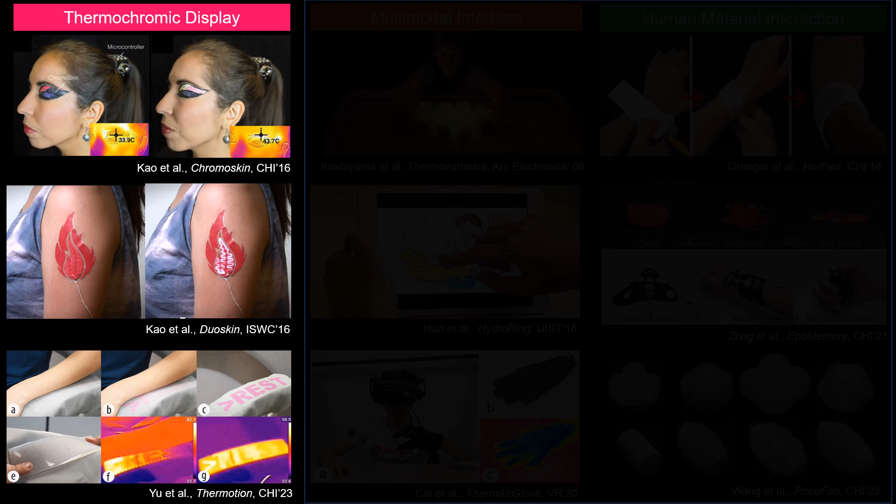Heat has been used in many areas of HCI research. For instance, a variety of wearable and ambient thermochromic displays have been investigated by controlling the thermochromic ink color based on temperature. Media artists and XR researchers have explored the thermal sensation in multimodal interfaces to enhance the reality of digital images and virtual objects.

With the emergence of the FDM 3D printer, heat has become a popular medium to customize the shape of 3D printed structures and is often used as a stimulus to transform multiple shapes in human-material interaction. Thermoelectric Peltier modules, thermofluid systems, and Joule heating circuits have been used as common heating methods.

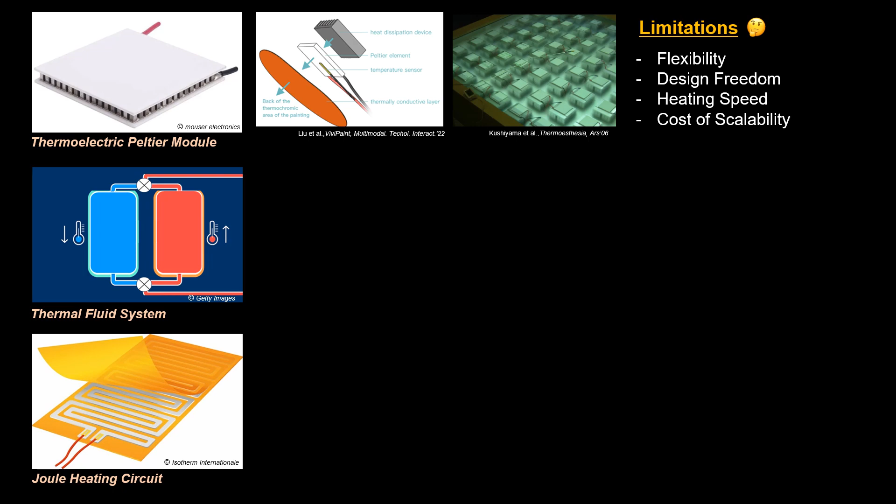However, there remain critical issues. For instance, the Peltier module is bulky and not flexible. It is also expensive to scale the number of units. The thermofluid system has been used in flexible thermal interfaces and flexible thermochromic displays. However, we need an external water bath and a complex fluid control system, which makes it difficult to build a compact built-in heater.

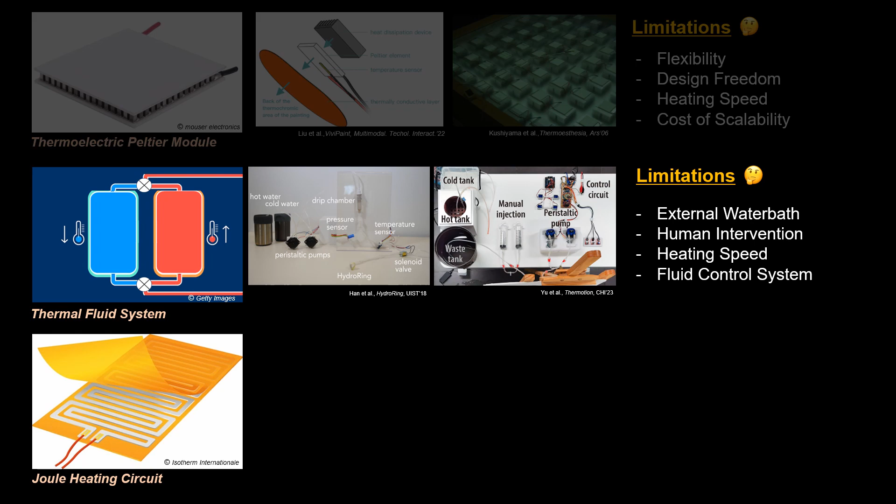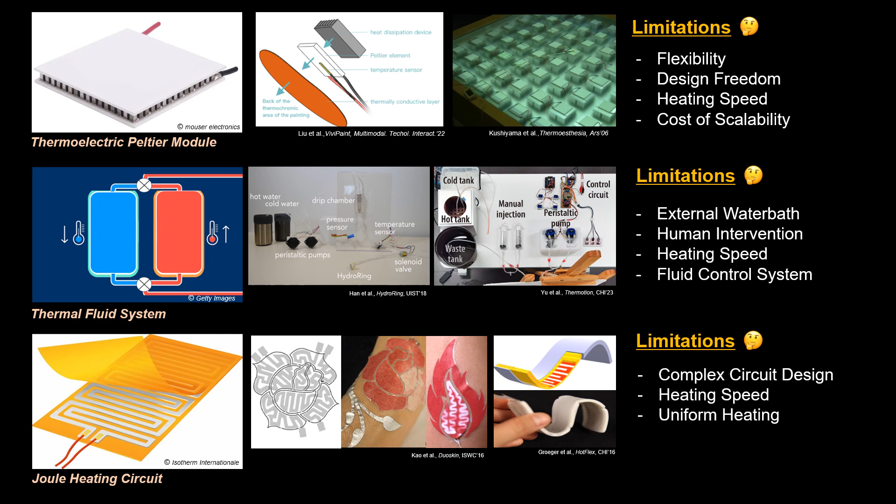Joule heating has become the most popular approach for flexible and embeddable heaters. However, it is difficult to design heating circuits with complex shapes. Uneven heating and limited heating speed remain a problem in thermochromic displays and human-material interaction. To address these issues, we explore the possibility of the carbon nanomaterial Joule heater as an alternative method.

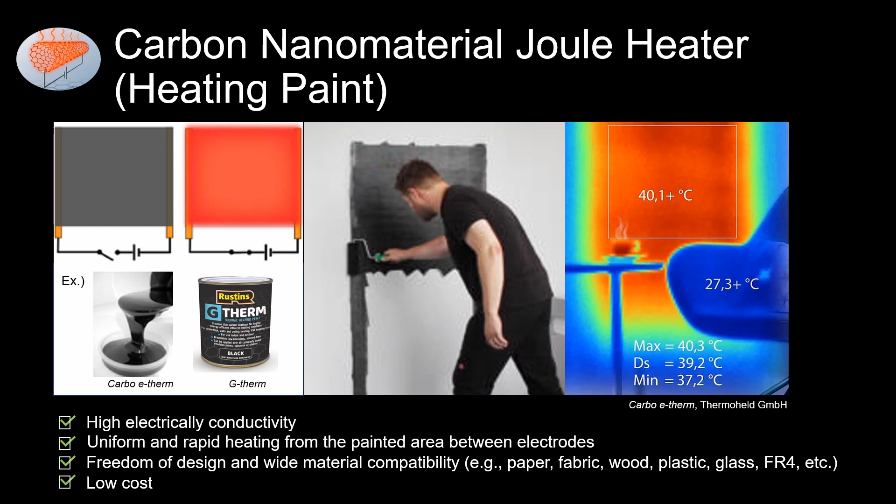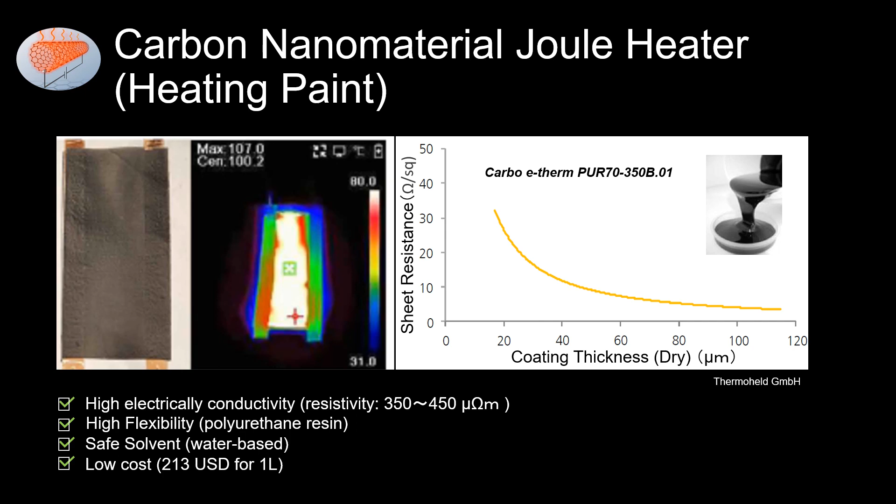Carbon nanomaterial heating paint is a highly electrically conductive ink and can rapidly radiate heat from the painted area by applying current. Since it is low cost and applicable to various materials, it has been widely used in heatable wall and antifreeze applications. We investigated this high potential capability to open up new opportunities in the HCI research field. Among many commercially available heating paints, we investigated Carbo e-therm PUR70 because it is a flexible, inexpensive, and safe water-based ink.

The fabrication of the heater is very simple. In the following example, we used conductive copper tape as the electrode and 2 cm by 1 cm copy paper as a heating substrate. First, attach the copper tape electrode and power cable to the side of the paper. Then brush both electrode and paper evenly with heating paint. Dry the paint with a heat gun for around 10 seconds. Finally, to protect the painted surface from damage, apply insulating silicone spray. By applying voltage, you can check the painted area rapidly heat up in a few seconds.

We compared the thermal performance of the carbon nanomaterial heater with a conventional serpentine heating circuit. We made the sample heating circuit by printing PET film with silver nanoparticle ink. Heating paint was applied to the same PET film for a fair comparison, with a film applicator and brush paint. We measured the minimum, maximum, and average temperature of a 2 cm by 1 cm heating area with an Arduino-based heat control system and custom thermal camera image processing tools based on PureThermal 3. The experiment was conducted at room temperature without airflow.

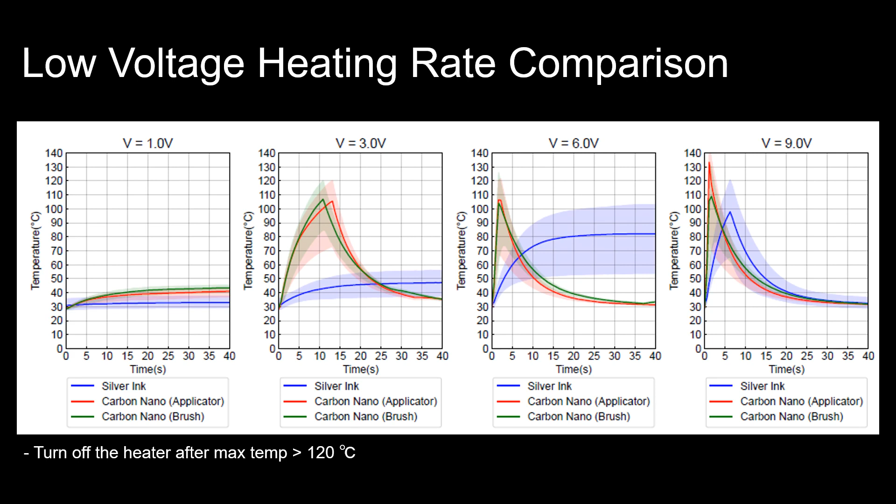This graph shows a comparison of the heating and cooling rate at different target temperatures. Since carbon nanomaterial has high thermal conductivity, both heating and cooling rates are better than silver ink, demonstrating the high power efficiency to reach the target temperature at low voltage. The narrower color band of the carbon nanoheater also indicates a good uniform heating capability.

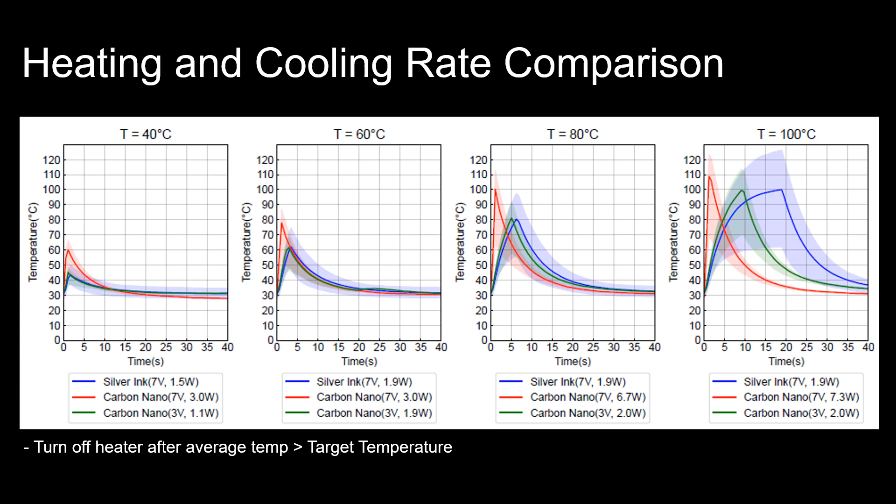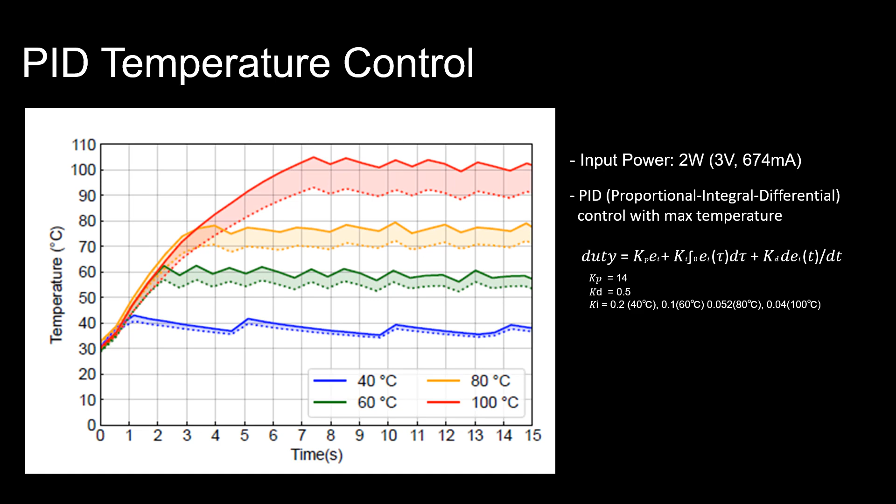While it was difficult to control the rapid heating ability of the carbon nanomaterial heater, we found we can control the maximum temperature at low voltage, around 3 volts, by using PID control. We empirically optimized the PID parameters and achieved temperature stability with ±2 degrees Celsius deviation.

Next, we would like to introduce the stencil mask painting technique to create complex shape heaters. We made a heater with the shape of the Chinese character for heat. We use copper tape film as the electrode and silk mesh as a substrate to absorb the heating paint. First, we attach the copper tape film to the silk mesh with a spatula.

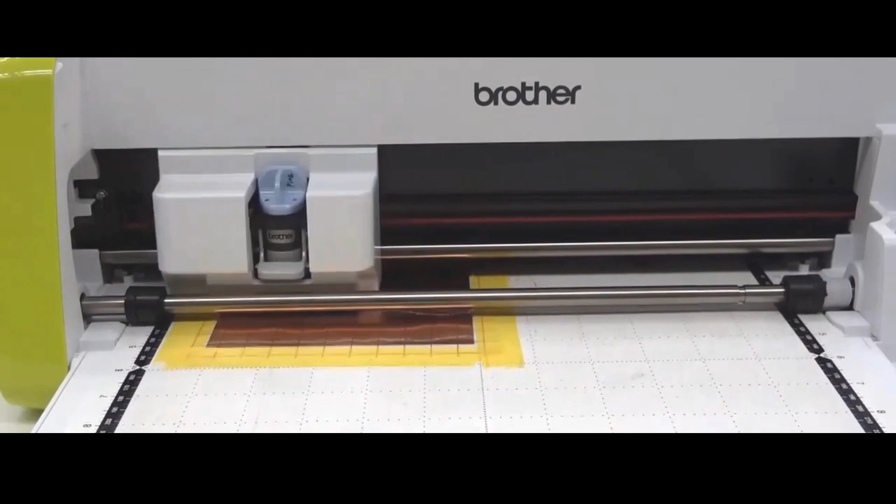We then use the cutting machine to make the stencil mask by cutting another copper sheet into the target shape. We manually clean the residue and use a transfer tape to attach the copper stencil mask as a positive electrode to the top of the screen mesh.

We then evenly painted the screen mesh through the stencil mask with heating paint and dry it with a heat gun. We finally remove the painted stencil mask film from the copper electrode film. The resistance of the heater was measured to be 28 ohm. After applying voltage, the heater uniformly radiated heat at the painted segment and displays the designed thermal Chinese character image.

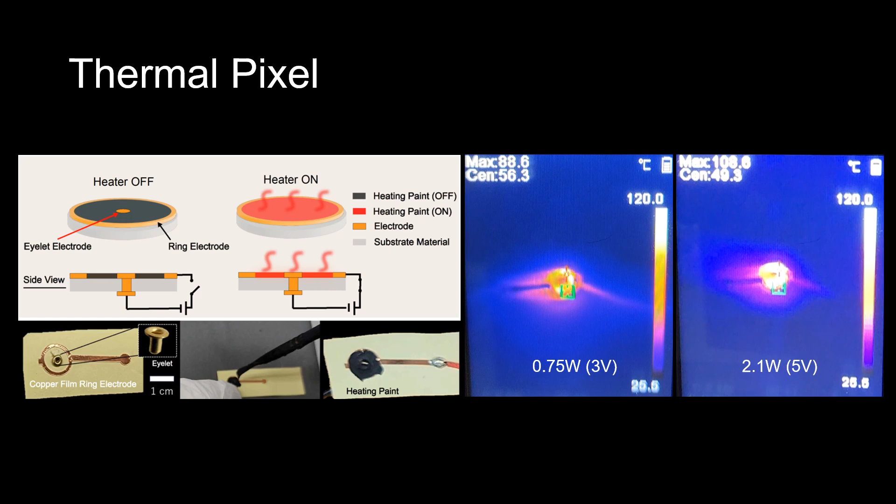As another design scenario, we would like to introduce a grid array heater to demonstrate the high scalability. Inspired by the via of the circuit board, we fabricated a compact thermal pixel using the metal eyelet and annularly cut copper tape in the form of concentric electrode. We then applied the heating paint to the circular space inside the outer electrode to create 1 cm diameter heater.

We applied this method to create 5x5 dot matrix heater by attaching wired eyelet to the 3D printed TPU substrate. We cut copper tape film into annular electrode array to share the electrode for each row. We use a transfer film to attach the center of each annular electrode to the corresponding eyelet positions.

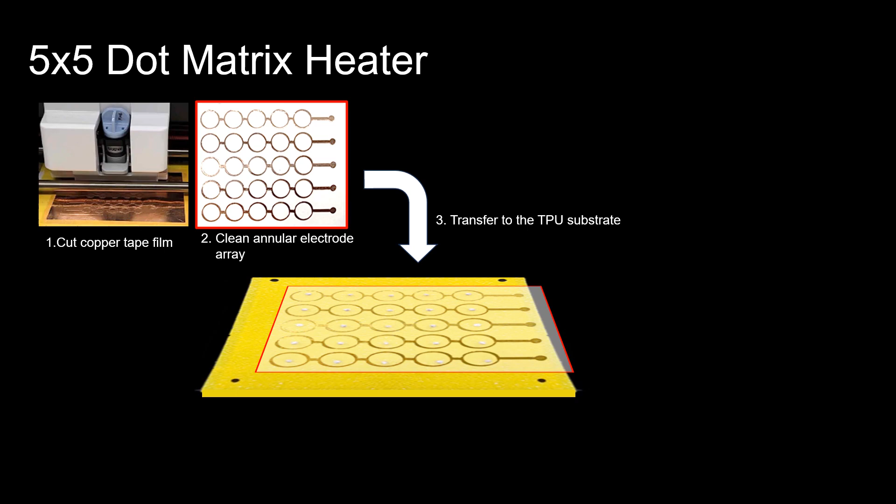We then applied heating paint with stencil mask to paint 5x5 grid array with 1 cm diameter circles. We finally removed the stencil mask and placed the cover sheet to hide the electrode between thermal pixels. We built 5x5 matrix heater control system with DMX PWM dimmer and Arduino DMX shield.

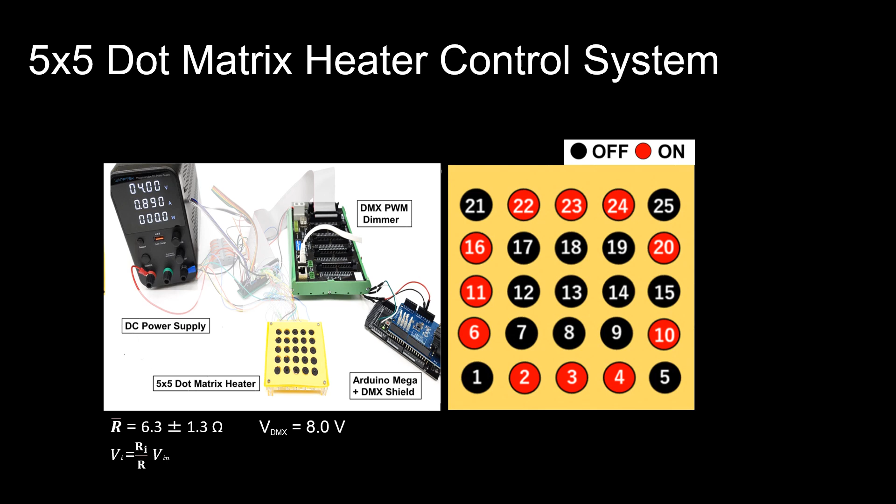We control the voltage of each electrode based on 5x5 toggle switch interface. We calibrated the input value of electrode voltage to normalize the resistance difference among thermal pixels. We managed to draw alphabet letters and symbols with high response thermal pixels.

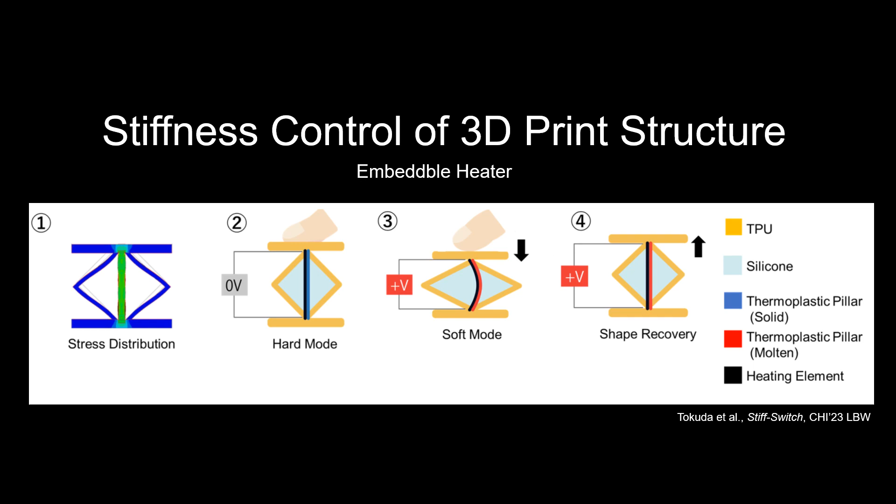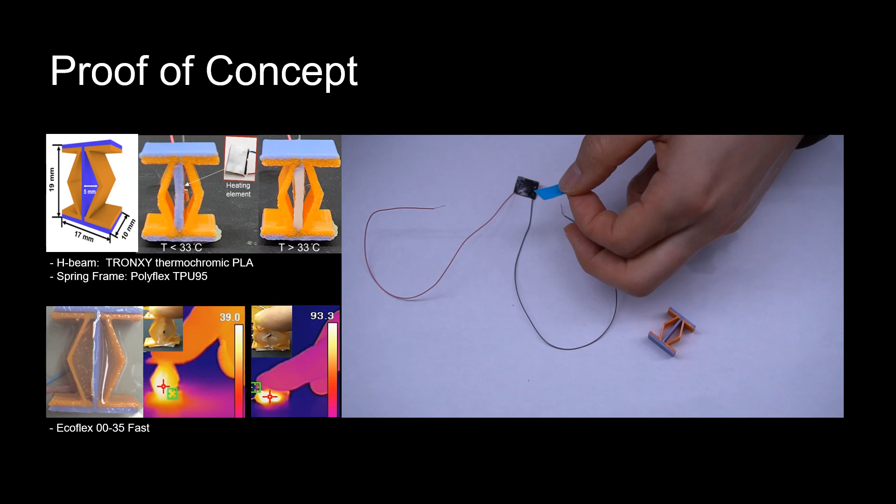We 3D printed H-beam with thermochromic PLA to indicate thermal state and integrated with TPU frame to add shape recovery ability. Unfortunately, heating paint was not so adhesive to the plastic and cracked as the surface was deformed. Hence, we built a compact flexible heater with a copy paper and attached it to the pillar and infilled the silicone to enhance the elasticity.

We measure the buckling strength at multiple control temperatures with custom compression testing machine. At room temperature, the H-beam structure resisted 279 Newton load. After heating the pillar with 8 volt, the buckling strength dramatically decreased as the temperature increased and became soft enough to compress with 21 Newton at 90 degrees and recover the original shape immediately after releasing the stress.

Finally, we would like to introduce multiple application scenarios. Since heating paint is flexible, we can easily prototype a flexible thermal interface with a soft material. For instance, we found off-the-shelf band-aid tape is a good substrate for heating paint and facilitates low-cost fabrication of thin finger thermal interface.

We also found capacitive touch sensing ability of the conductive carbon nanomaterial heater. By integrating thermochromic ink, we can create interactive thermal paper interface, such as multimodal picture and autonomous erasing paper.

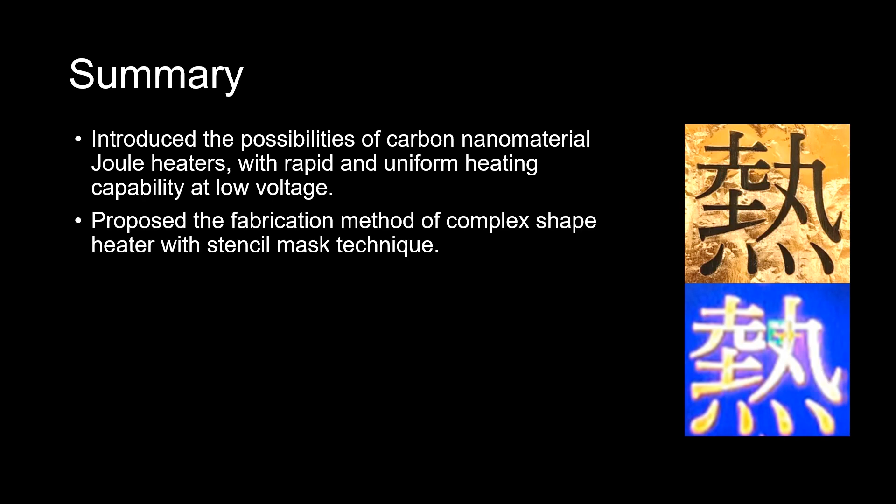In summary, we introduced the possibility of carbon nanomaterial joule heater with rapid and uniform heating capability at low voltage. We propose a fabrication method of complex shape heater with stencil mask technique. We investigated the design of compact thermal pixel and the scalability with 5x5 grid array heater.

We explored the thermal stiffness control of 3D printed structure with built-in carbon nanomaterial heater. We also demonstrated the application scenario for interactive thermal displays and stiffness control shape-changing pneumatic interface.

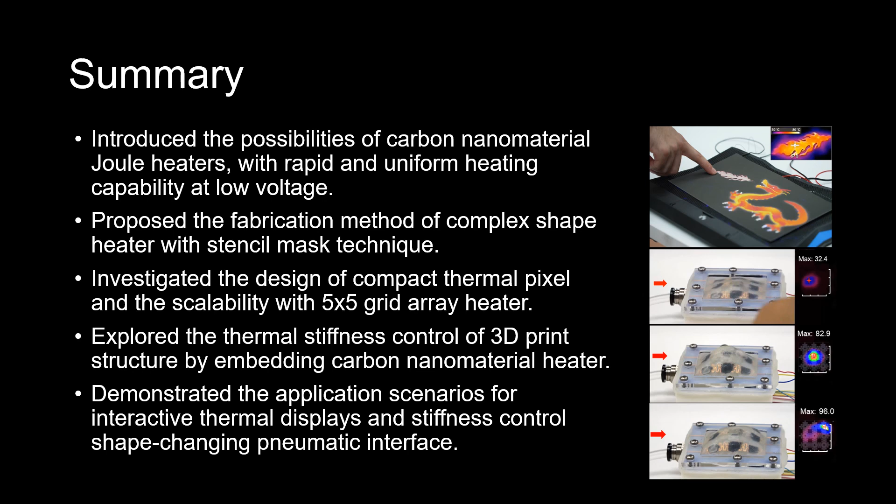As future work, we plan to explore the possibility of heating paint integration with some reactive actuation material like volatile liquid and liquid crystal elastomer. We are also interested in the design space of augmenting everyday object and programmable matter with digital fabrication of the carbon nanomaterial heater with smart materials.